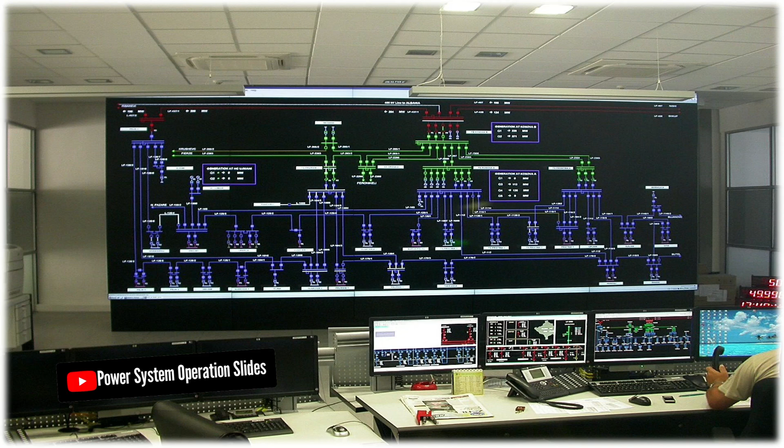Supervisory Control and Data Acquisition, SCADA, represents one of the most critical technological advancements in modern power system management. These sophisticated systems form the backbone of contemporary electrical infrastructure, enabling utilities to monitor and control vast networks of power generation, transmission, and distribution equipment from centralized locations. At its core, SCADA combines hardware and software components that work in concert to provide real-time visibility into power system operations while allowing for remote control capabilities that were previously impossible.

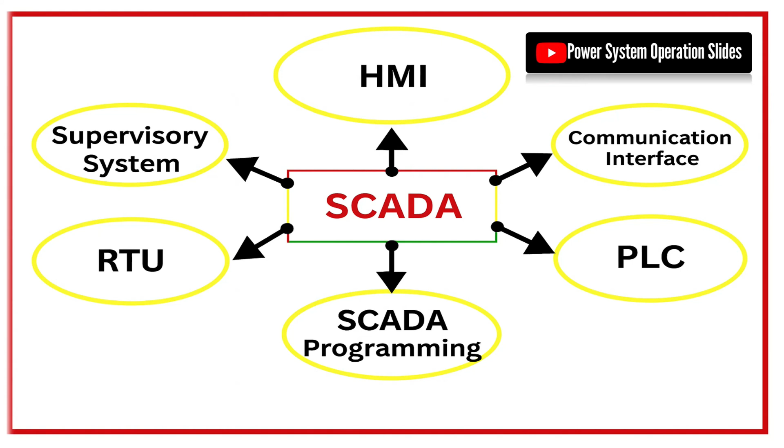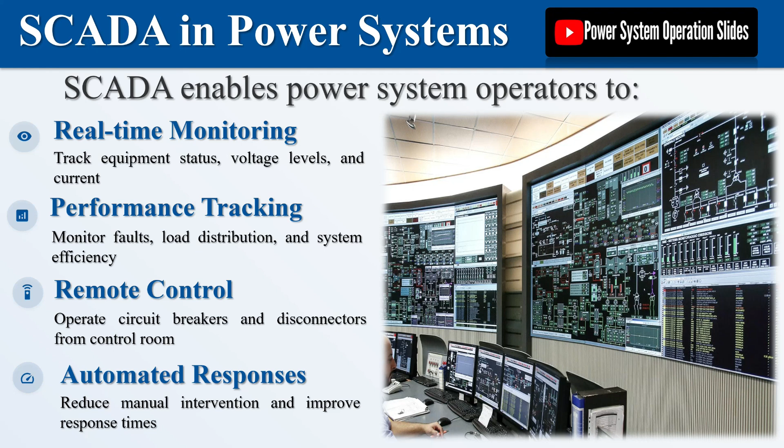The evolution of SCADA systems has transformed power utilities from reactive organizations that responded to issues after they occurred to proactive entities that can anticipate and prevent problems before they impact service reliability. This transformation has been particularly valuable as power systems have grown increasingly complex with the integration of renewable energy sources, smart grid technologies, and sophisticated distribution networks. Modern SCADA systems can process millions of data points per second from thousands of remote locations, presenting this information in intuitive interfaces that allow operators to make informed decisions quickly.

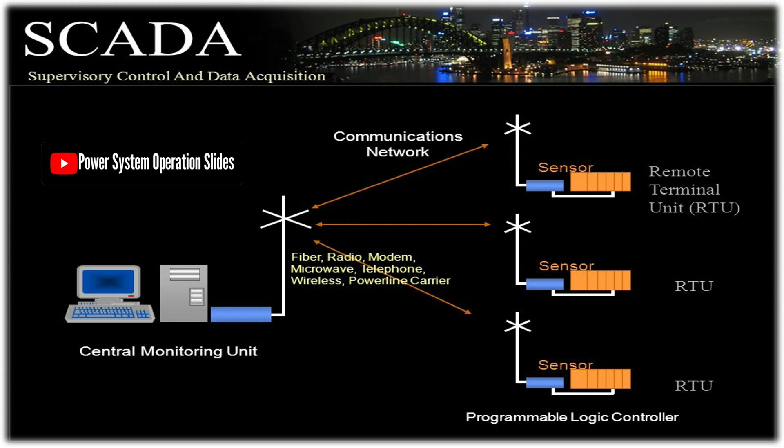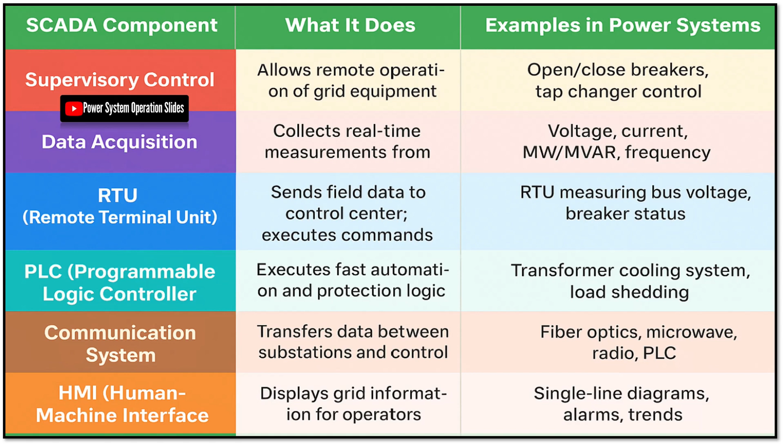In a power system context, SCADA serves as the central nervous system, continuously monitoring the health and performance of equipment such as circuit breakers, transformers, and feeders. It provides operators with the ability to remotely control operations like opening or closing circuit breakers and disconnectors, which dramatically improves operational efficiency and safety. The data acquisition capabilities of SCADA systems enable utilities to track performance metrics, identify emerging issues, and implement predictive maintenance strategies that extend equipment life and reduce downtime.

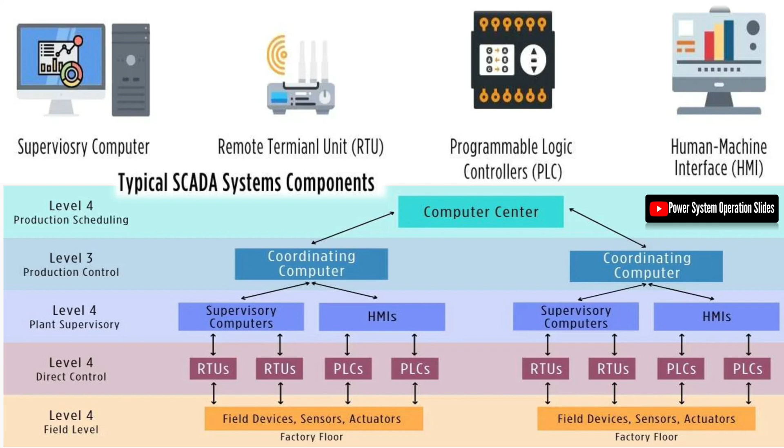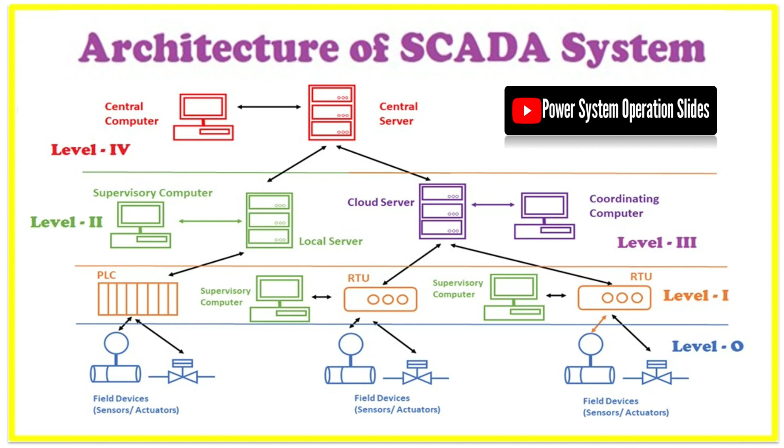Components of SCADA systems in power systems. A SCADA system in the power industry comprises several interconnected components, each serving a specific function in the overall architecture. The first critical component is the remote terminal units, RTUs, which act as the interface between field equipment and the central control system. These devices collect data from sensors, transformers, and breakers, converting analog signals into digital data that can be transmitted to the control center. RTUs also serve as the execution point for commands sent from operators, translating digital instructions into physical actions at remote locations.

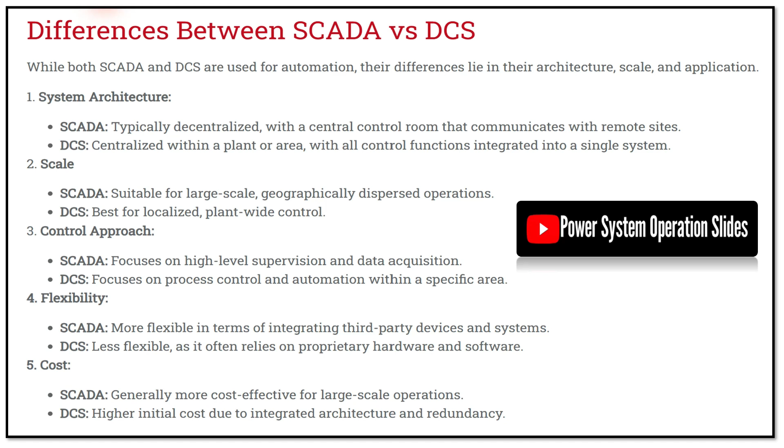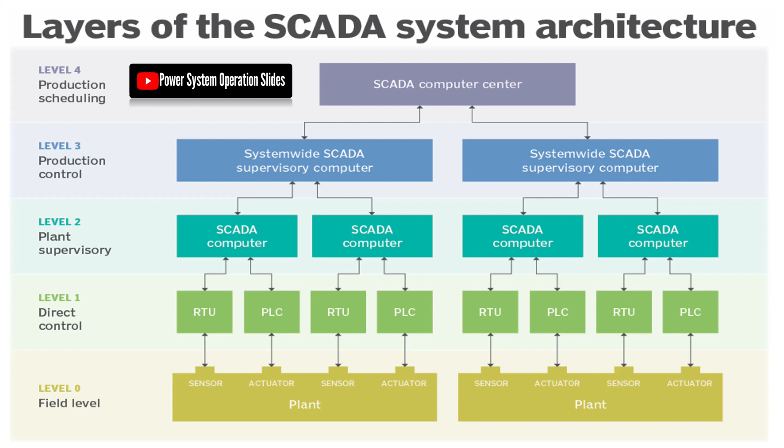Sensors represent another fundamental component of power system SCADA implementations. Various types of sensors, including current transformers, CTs, voltage transformers, VTs, and temperature sensors, continuously measure critical parameters across the power grid. These sensors provide the raw data that forms the foundation of SCADA monitoring capabilities, enabling operators to track voltage levels, current flows, and equipment temperatures in real time. The accuracy and reliability of these sensors directly impact the effectiveness of the entire SCADA system.

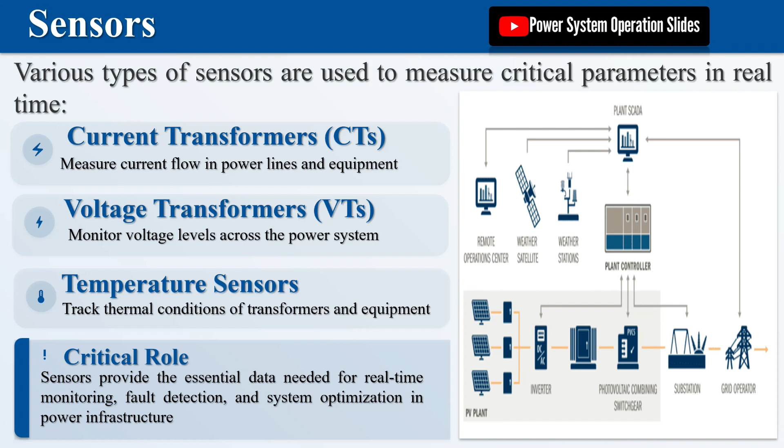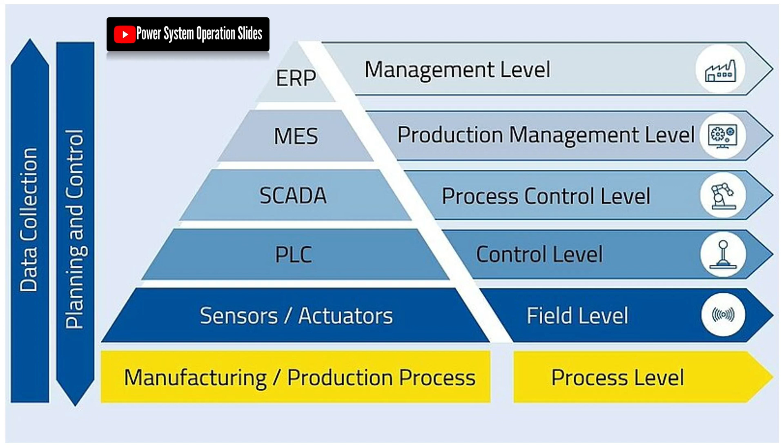The communication infrastructure forms the connective tissue of SCADA systems, facilitating the transmission of data between field devices and the central control center. This infrastructure may utilize wired or wireless technologies, employing specialized protocols such as Modbus, DNP3, or IEC 61850 that are optimized for power system applications. The reliability and security of this communication network are paramount, as any disruption could compromise the ability to monitor and control the power system.

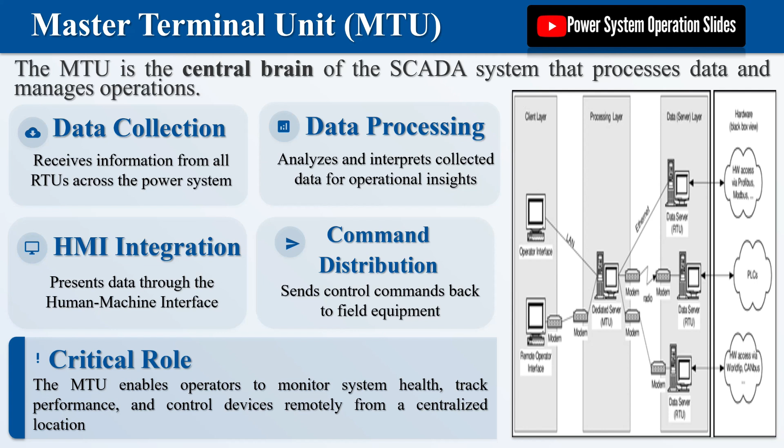At the heart of the SCADA system lies the Master Terminal Unit, MTU, which serves as the central processing hub. The MTU receives data from all RTUs across the network, processes this information, and presents it to operators through a human-machine interface, HMI. The HMI provides a graphical representation of the power system, displaying real-time data, fault alarms, and system status in an intuitive format that enables operators to quickly assess conditions and make informed decisions. Finally, the control system component enables operators to take action based on the data insights, implementing control commands that can isolate faults, restore power, or adjust equipment settings to optimize system performance.

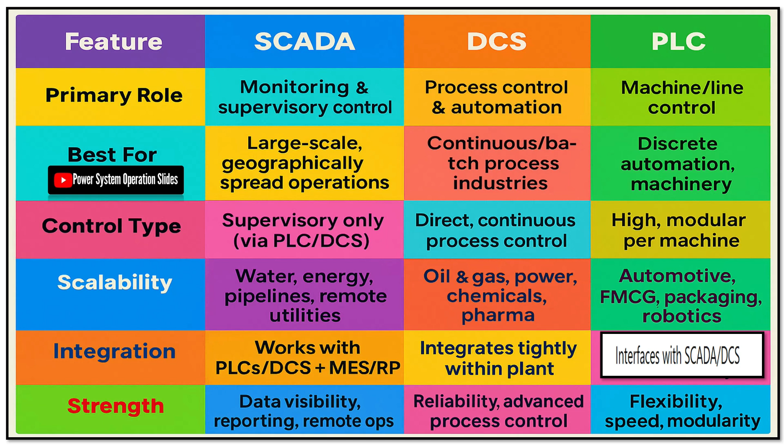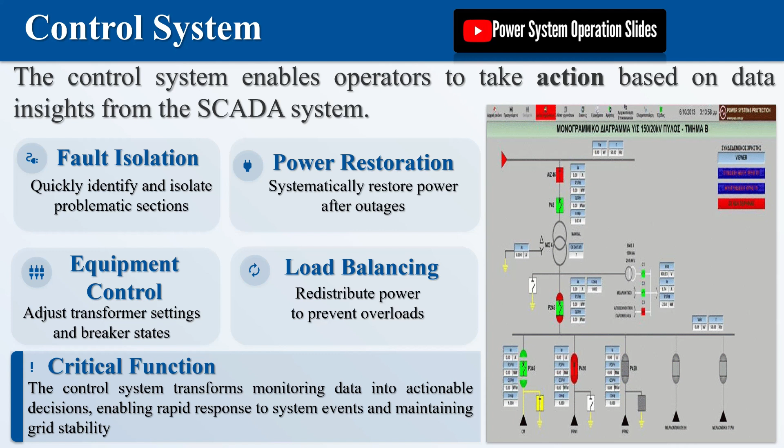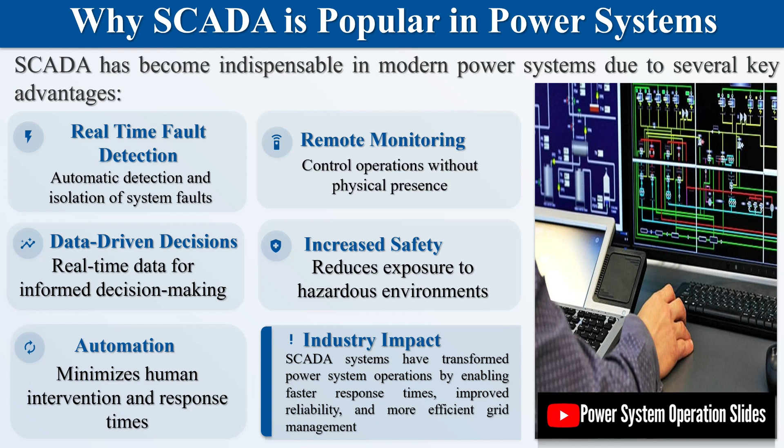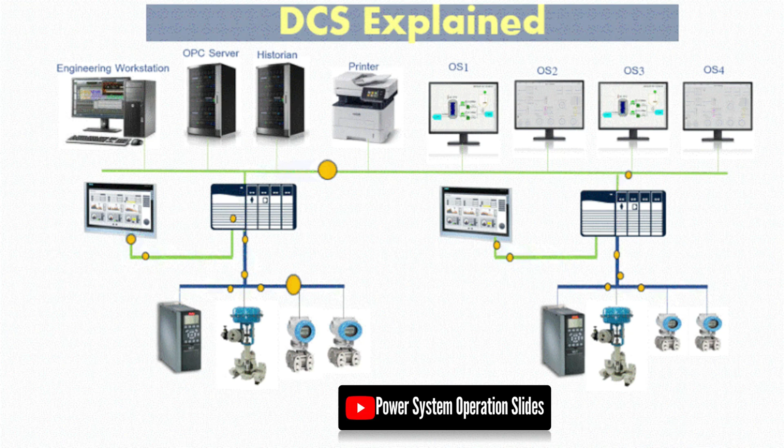Why SCADA is popular in power systems. The widespread adoption of SCADA systems in the power industry stems from the numerous advantages they offer over traditional operational approaches. Perhaps the most significant benefit is the capability for real-time fault detection and isolation. Without SCADA, identifying faults in the power system often relied on manual reports from customers or field engineers, resulting in delayed response times and extended outages. SCADA systems automatically detect faults, isolate affected sections, and can restore power with minimal delay, often without human intervention. This capability dramatically reduces outage durations and improves service reliability for customers.

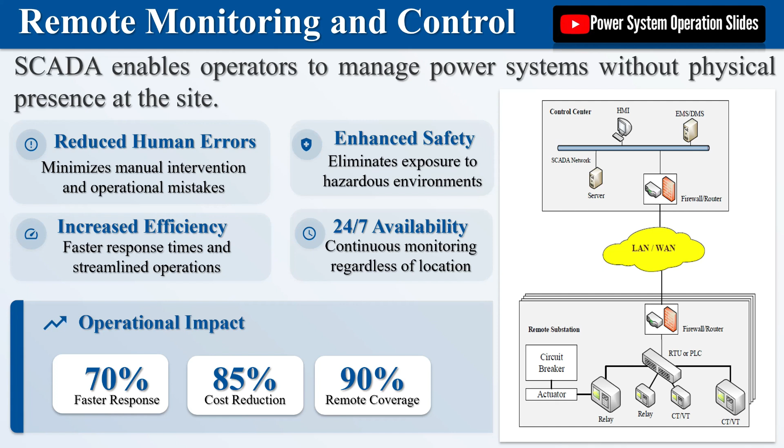Remote monitoring and control represent another key advantage of SCADA systems in power applications. Operators no longer need to be physically present at substations or other facilities to operate equipment, which enhances both safety and efficiency. This remote capability reduces human errors, minimizes exposure to hazardous environments, and allows for more rapid response to system events. During extreme weather events or other emergencies, when physical access to facilities may be dangerous or impossible, SCADA systems enable utilities to continue managing their infrastructure effectively.

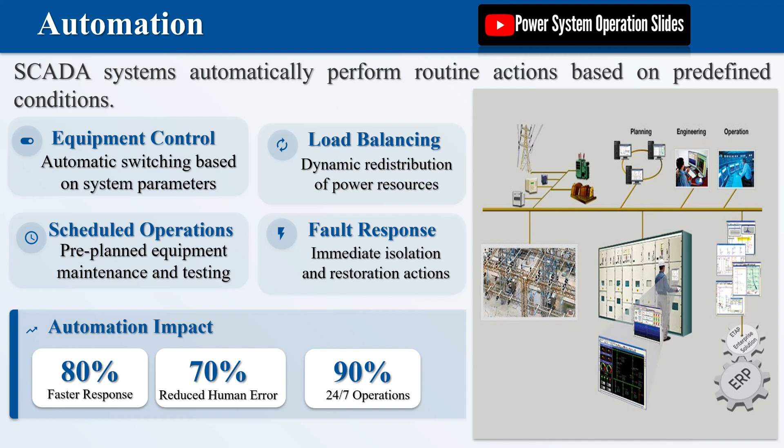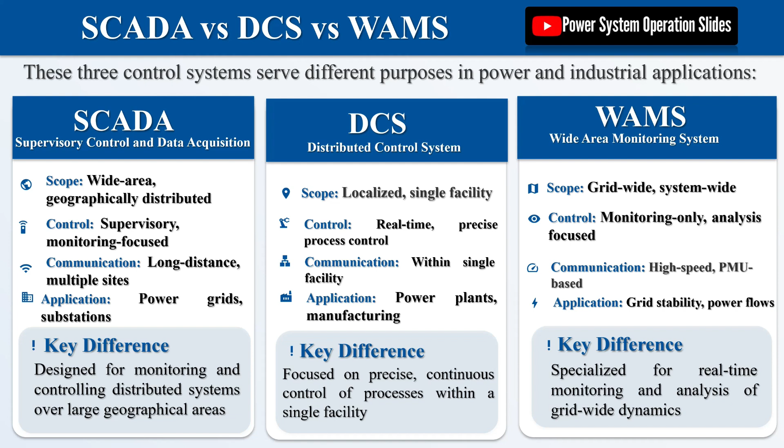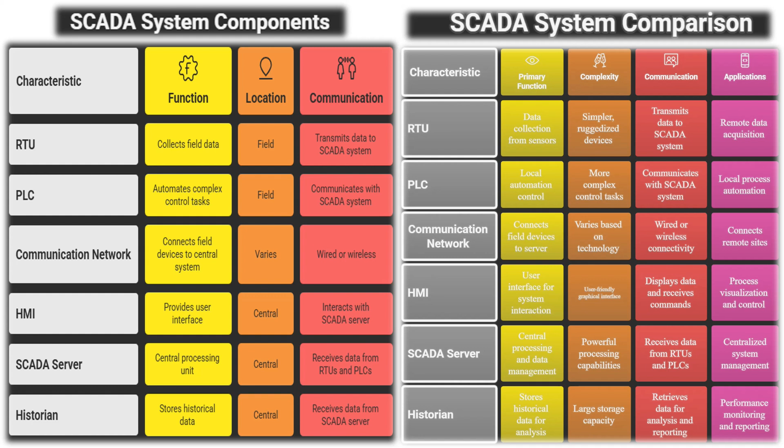The data-driven decision-making capabilities enabled by SCADA systems have transformed power system operations. By providing operators with real-time data on voltage levels, currents, temperatures, and other critical parameters, SCADA allows for more informed operational decisions and proactive maintenance strategies. Utilities can identify trends that indicate developing problems before they result in equipment failure, implementing preventive measures that extend equipment life and reduce maintenance costs. This data-centric approach also supports better load management and more efficient utilization of existing infrastructure.

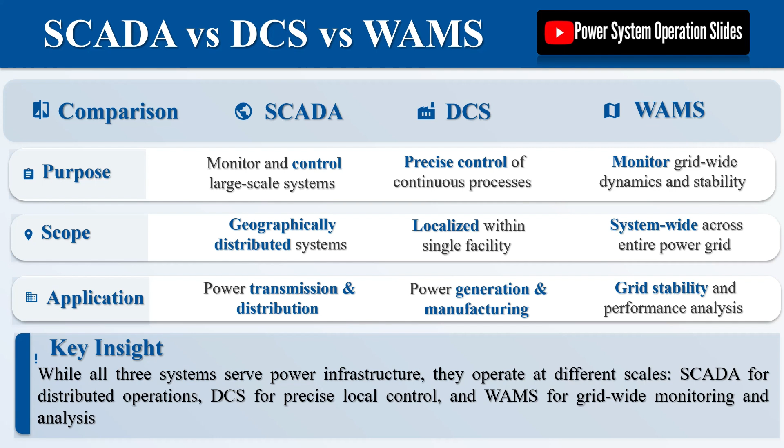Safety improvements represent another compelling reason for SCADA's popularity in power systems. By allowing remote control of equipment, SCADA reduces the need for operators to enter potentially dangerous environments such as high-voltage switchyards or substations. This not only protects personnel from electrical hazards but also reduces the risk of accidents during maintenance operations. The ability to remotely de-energize equipment before personnel arrive for maintenance further enhances safety protocols.

Finally, the automation capabilities of SCADA systems have made them indispensable in modern power operations. These systems can automatically perform routine actions such as switching equipment on or off based on predefined conditions, minimizing the need for human intervention and reducing response times during system events. This automation not only improves operational efficiency but also ensures consistent application of operational procedures, reducing the potential for human error.

Security challenges and future trends. Despite their numerous benefits, SCADA systems in power applications face significant security challenges that utilities must address.